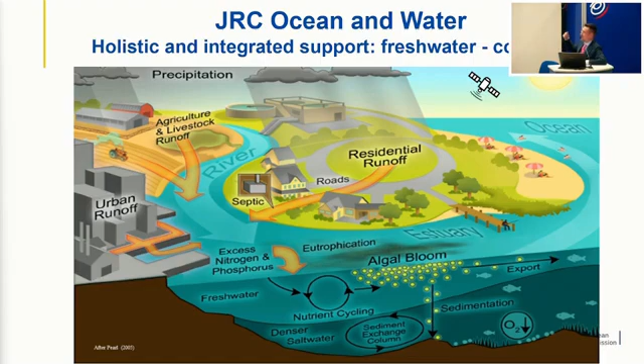In particular, I work in the water field; our unit works in different kinds of water, from the ocean to the rivers, hydropower, water in cities, for agriculture, for example. Here are all the directives where our unit has been involved in order to support the European Commission in this different legislation. Today I will talk about sustainability in hydropower with focus on pump storage hydropower plants.

As you know, hydropower is at the center of a big debate because it is renewable, so a lot of benefit for the clean transition, but on the other hand, there may be also some impact that could be generated, especially when a new dam is installed in a river. On one hand, indeed, we have a lot of benefit that hydropower provides, renewable energy, flexibility, storage, but also export capacity. If we consider all the global export of hydropower equipment, European Union companies hold 50% of this, so also more than China.

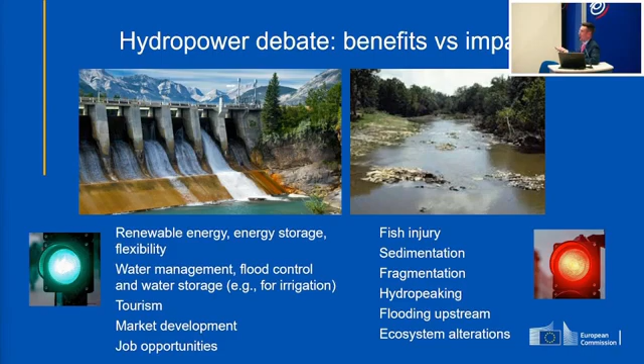But on the other hand, there may be some impact that we should not ignore. As for all the other energy technologies, there are impacts also for hydropower, especially on fish, on sedimentation, on river fragmentation. And this conflict can also be seen in different directives of the European Union. On one hand, we have, for example, the environmental directives, like the Water Framework Directive, where hydropower is an impact. But on the other hand, we have the Renewable Energy Directive, where hydropower is key to the energy transition.

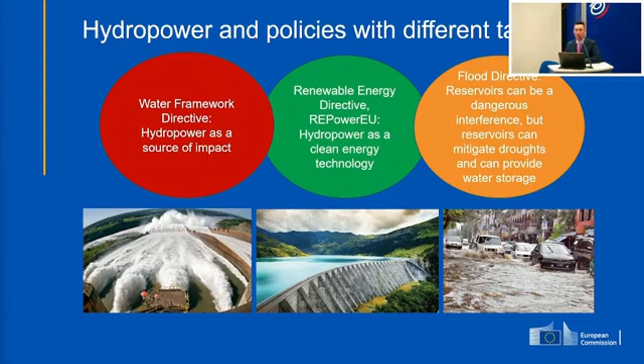Then there are other contexts, like, for example, the floods, where barriers in rivers can obstruct river flow and so exacerbate the floods, but reservoirs, on the other hand, can store water and mitigate floods. So also in this case, we have different conflicting targets of hydropower and reservoirs. So in order to achieve sustainability in hydropower, we need to find the balance between the impact and the benefit, and try to promote sustainable solutions and sustainable strategies for hydropower. And this is the topic of today.

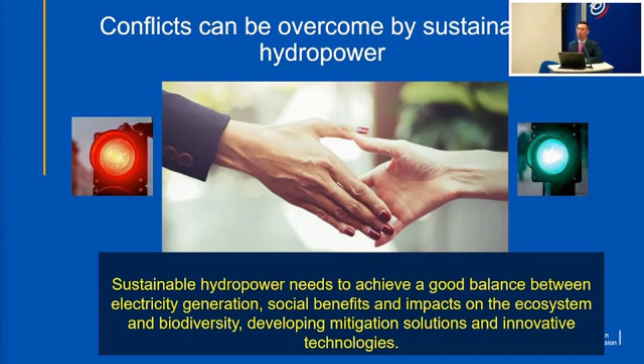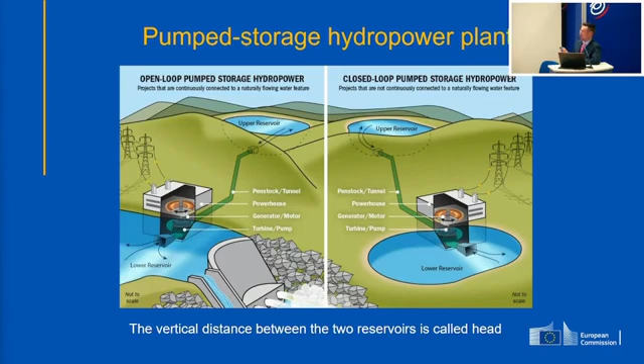I will show you some potential, some numbers. So how much more hydropower we can build in a sustainable way, with focus on the European Union, in particular pump storage hydropower. Just a few words about pump storage. Pump storage plants are generally constituted of two reservoirs, sometimes more, connected with pumps and turbines. It is possible to pump water when we need to consume energy, and when we need to produce energy, we activate the turbines. We can distinguish between closed loop and open loop. Closed loop is when pump storage hydropower plants are not connected with rivers, while open loop is when they are connected with rivers.

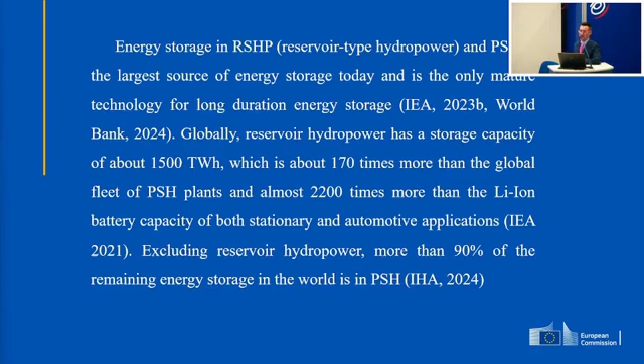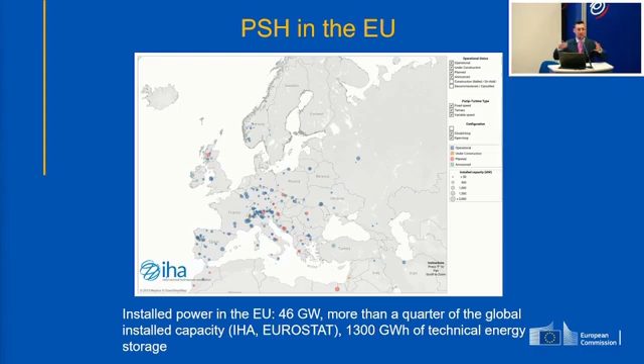And in the European Union, the installed capacity in turbine mode of pump storage hydropower is 46 gigawatts, that is more or less 25% of the global installed capacity of pump storage. So the European Union, also in this case, is a leader in pump storage hydropower plants. And what is the energy storage in pump storage hydropower plants? We define energy storage in gigawatt hours, the amount of energy that can be generated in one cycle. And this is more or less 1,300 gigawatt hours. So if all pump storage hydropower plants generated energy together in one cycle, that would be 1,300 gigawatt hours. These are estimates. Obviously, the result may change a bit, but more or less this is the order of magnitude.

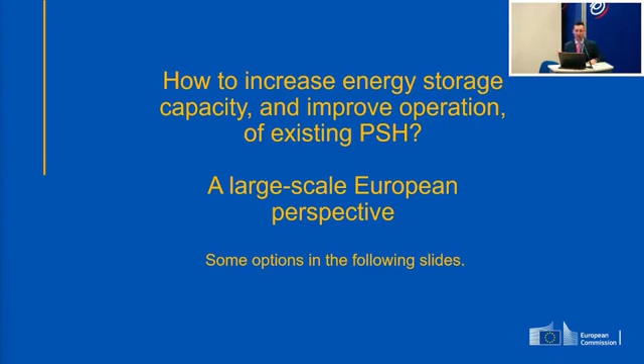Okay, now I will show you some sustainable options. The first slides are on this topic. So how is it possible to increase this energy storage capacity by simply improving the operation of the existing pump storage hydropower plants? Improving the operation means that no new barriers are added, so no new impact, only benefit. The first option is to modernize them.

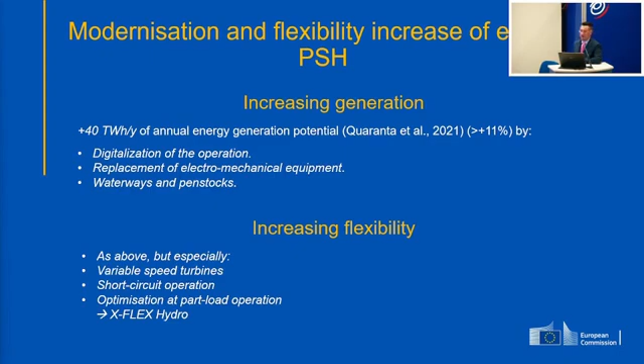We carried out an assessment, generally for hydropower, with new technologies, digital solutions, new electromechanical equipment, new waterways and penstocks. We can increase energy generation by more or less 10% at the European scale. Obviously, pump storage hydropower is more important not for energy generation, but for flexibility. I will not go into the detail because Matteo, in the project X-Flex, already explained very well how pump storage can be upgraded in order to improve flexibility. For example, with variable speed turbines, short circuit operation, digital solutions.

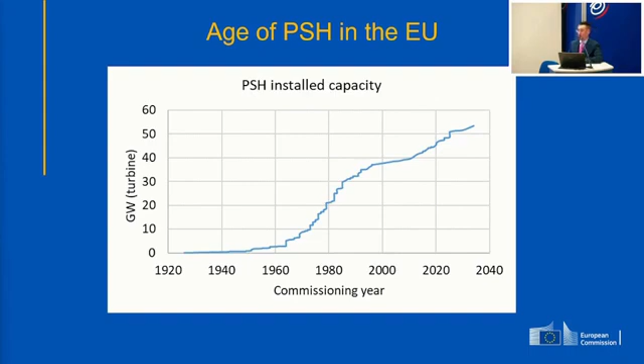And why it is important to refurbish pump storage, and in general hydropower. Here you see the increase of installed turbine capacity in pump storage hydropower over the years. You can see that there has been a boom after the Second World War, around 1960 to 1980. Then in the last years there is an increase, but very slight. So most pump storage hydropower plants fall in the category 1960 to 1980. So they are quite old, 50 years old, and there is a need to refurbish them.

Another option to increase the storage capacity of reservoirs and of pump storage is, for example, to increase the height of the dam where it is possible. There has been a study and several case studies in Switzerland showing that by increasing the height of the dam by 5 to 10%, it is possible to increase the storage capacity at the national level, for all Switzerland, by 30%. And this reasoning could be more or less extended to the whole Alpine context.

Also, sedimentation is important because every year, more or less, 1% of the storage volume is lost due to sedimentation. And this obviously limits the storage capacity. But dredging also has a cost. Enel also showed costs of some euros per cubic meter. If we extend this analysis to all the European reservoirs, we came up with a calculation that dredging costs more or less between 2 to 8 billion euros per year. So sedimentation is important, but there are also costs.

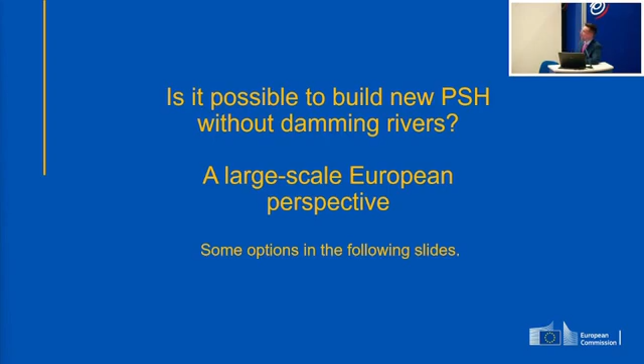So now the second approach: is it possible to build new pump storage without building new dams? Yes, for example by using existing structures or existing infrastructure. The first is using abandoned mines. There is a European project called Atlantis that is addressing this topic, using abandoned mines to create pump storage hydropower plants. According to some calculations, at the European scale, the potential of the most economic sites is 3 terawatt hours. If you remember, I said that the current storage capacity in pump storage is more or less 1.3 terawatt hours. Using abandoned mines can increase this by 3 terawatt hours, so more than double the existing capacity.

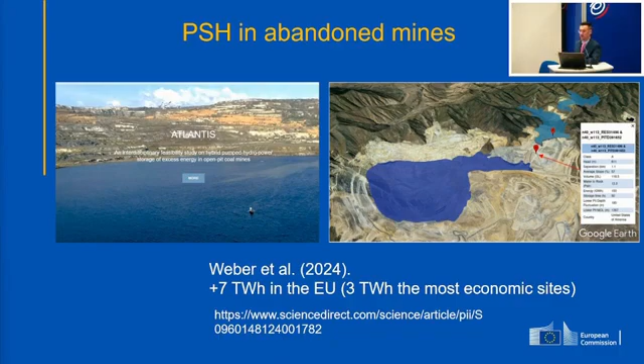Another option is to interconnect existing reservoirs or existing hydropower plants. Obviously, depending on the distance between the reservoirs, the potential can increase or decrease. If we assume, for example, to interconnect reservoirs within 20 kilometers, we have a potential of 14 terawatt hours. If we consider, more realistically, connecting only reservoirs within 5 kilometers, which is a reasonable distance, we have 886 gigawatt hours.

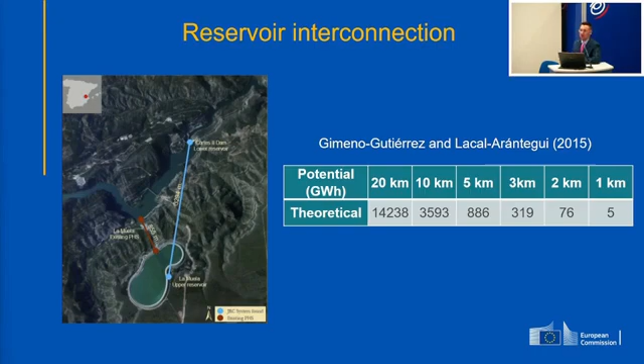Obviously, these are estimated potentials at the European scale. They are not exact numbers. They are estimations that are very difficult to perform, because when dealing with estimations on the European scale, we sometimes have a lack of data, and we have to make some assumptions, also involving external experts. But in any case, even if they are approximated, they show the order of magnitude, so the importance of each strategy: whether it is 1, 10, or 100. This is what matters at the European scale. Then at the local scale, more sophisticated calculations should be carried out.

Then the last option: is it possible to better operate the pump storage hydropower plants and the overall energy system in order to reduce the need for storing energy? Yes. For example, as some case studies by Enel showed, hybridization with photovoltaics is very important, both with floating photovoltaics and with photovoltaics on the face of the dams. Installing photovoltaics on the face of the dam is not very usual, so I'm very happy that there is an Italian company doing this. It's also possible to hybridize hydropower and pump storage with batteries, as Matteo Bianciotto explained.

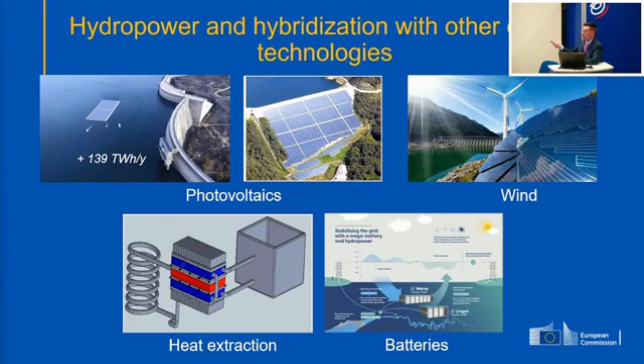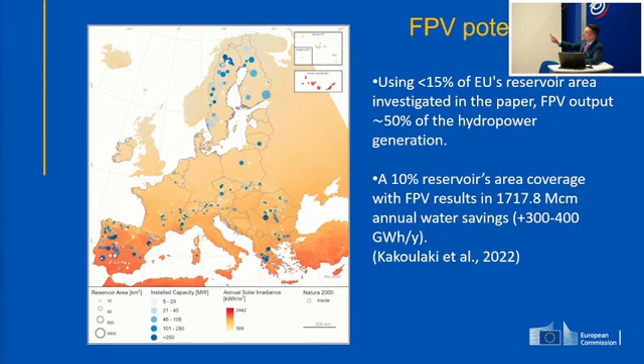Another strategy is to extract the heat from the cooling system of the generator. There are already some case studies on this, using this heat for district heating or for warming the buildings near the powerhouse. So there are different combinations, and also research projects on this. So these are reality, not just theory. Okay, floating photovoltaics: there is an assessment at the European scale. By supposing to install floating PV in the most suitable reservoirs in the European Union, we can produce an additional energy generation of more or less 50% of what hydropower is currently generating. It is also possible to reduce evaporation and so add an additional 300 gigawatt hours per year.

It is also possible to expand the grid, and there has been this very nice study, which is, I would say, not very realistic now, but in any case is an idealistic scenario that allows us to think a bit. If we suppose to interconnect all the hydropower plants, photovoltaic plants, and wind power plants over Europe, very idealistic, but just to think, it is possible to reduce the need for storing energy by 200 terawatt hours every 5 years, which is a lot. But this needs a lot of improvement to the grid.

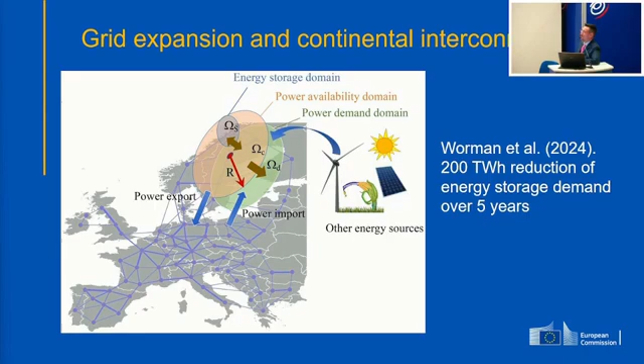Another solution to improve the operation of pump storage, as also discussed this morning, is to operate the reservoirs not as a single-purpose reservoir, so not only reservoirs for hydropower or for pump storage, but also for other purposes, like, for example, for flood control.

This is a figure that I took from ICOLD on the use of reservoirs in the European Union and Switzerland. You can see on the left that more or less 70%, so 2/3 of the largest water reservoirs, large dams in the European Union, are for only one use, and only 1/3 are for multiple uses. But if you look on the right, the 70% of dams for single uses store only 50% of the volume. So the multi-purpose reservoirs are fewer, but store more or less the same amount of volume as single-purpose reservoirs.

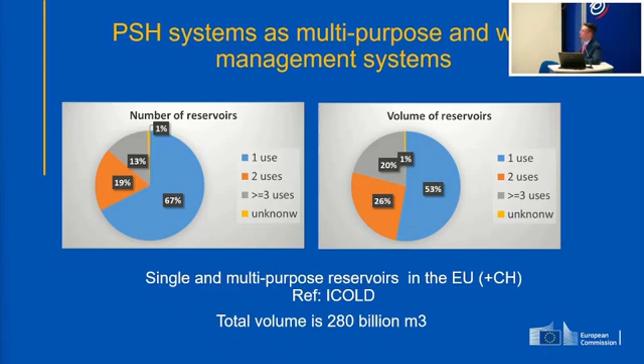So now the last topic is the possibility to build new pump storage from scratch, also near rivers, so new pump storage with new reservoirs. There has been another study at the European scale that has identified all the possible sites where it is possible to install pump storage hydropower plants from a topographical point of view. Then obviously locally there may be some environmental constraints, the cost may be high, and not all will be feasible, but at least from a topographic point of view, there is still a lot of room in the European Union and Europe for pump storage hydropower plants. Up to 300 terawatt hours, which is one order of magnitude more than what we have now. Obviously, not all are possible due to the problem of investment cost.

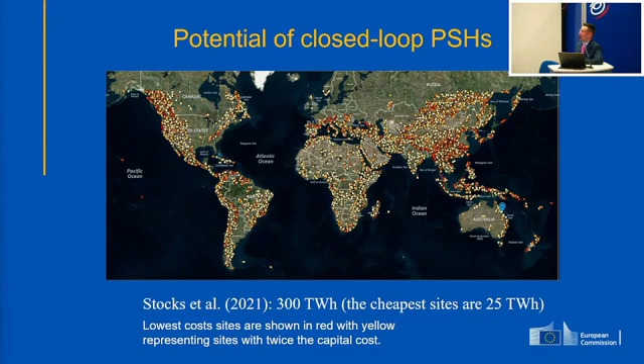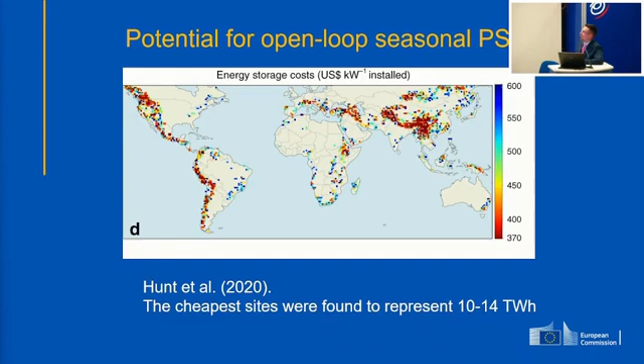Sorry, the last slide was for closed loop hydropower. This is for open loop pump storage hydropower, so for pump storage hydropower connected to rivers, and in the European Union, Europe, there is a potential of 10 terawatt hours, more or less.

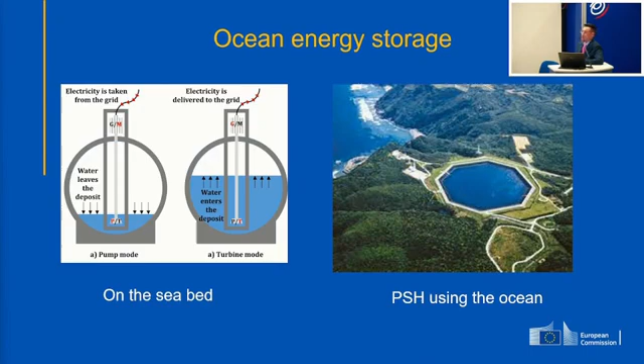Another option is to use the ocean as the lower reservoir and pump water to an upper reservoir, but there are problems with salinity of water, though there are still some projects in progress on this. Another technology now under development, under research, is the one on the left, of installing spheres on the seabed. There are problems, obviously, of cost and of the aggressivity of the water in the ocean.

So last slide, now not on pump storage, but on traditional hydropower. Is it possible to increase energy generation and create new hydropower plants without building new dams? Yes, it's possible. The first, as I said already, is refurbishment. Refurbishment is very important, not only to increase energy generation. More or less, we estimated that we can increase energy generation by 10% in Europe by using digital solutions and new electromechanical equipment. But refurbishment is also important because we can increase flexibility, sustainability, safety, adaptation to climate change, and also for water resource management.

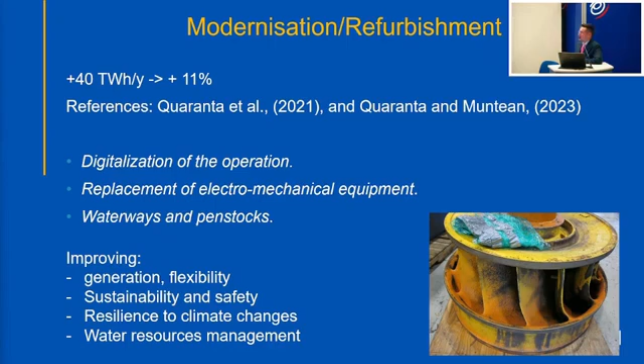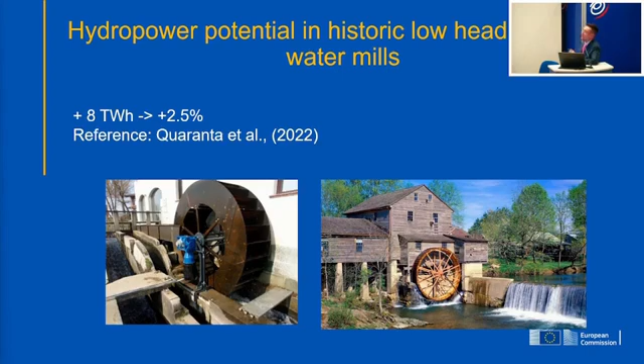It's possible also to repower existing small barriers that already exist, so we don't need to build new barriers. In European rivers, more than 400,000, so 450,000 barriers have been identified. They could be used for small hydropower, and the potential is 8 terawatt-hours per year, so more or less 3% of what is generated today by hydropower, supposing we repower all these barriers.

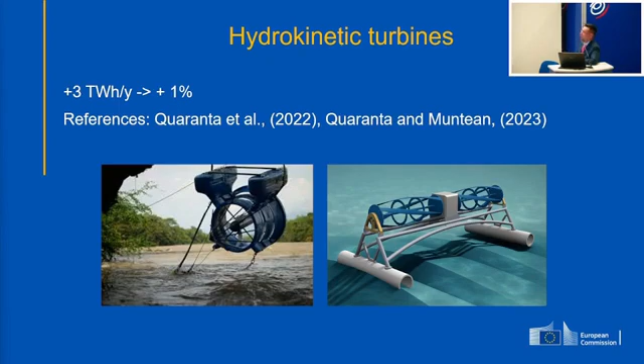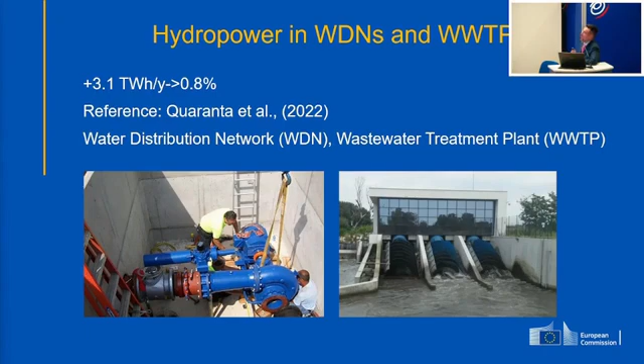Then another topic is hydrokinetic turbines. In the European Union, this is not a very high potential because, as you can imagine, rivers in Europe are generally shallow and quite slow. So the potential for hydrokinetic is not so important. Finally, it's possible to develop hydropower, for example, in water distribution networks and in wastewater treatment plants. Generally, also in this case, it is small hydropower. Here the potential could be 3 terawatt-hours per year, so more or less 1% of what is produced today.

Here are some key references, and I would like also to say that in a few weeks, the hydropower and pump storage report of the European Commission will be published. I will leave some leaflets here if you want to collect them. It is published every year, and comments from all types of stakeholders are very welcome. So if you read it and find something you would like to comment on, you can send me your opinion. Sometimes we have also included comments from companies in this report.